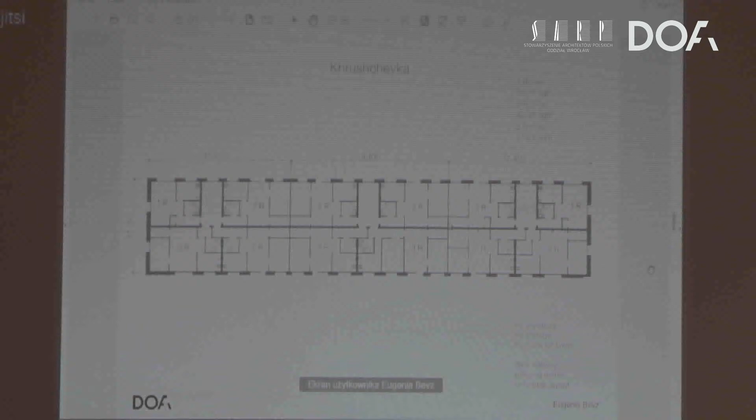And speaking of apartment layout, we had dark hallways, passing rooms, and inflexible layout. So we looked backwards at how housing, the most popular unit in the USSR, was built, and indicated what was there. The positive feature was that they all had a balcony.

The balcony is a very special feature that is widely popular to have privatized in post-Soviet countries, but also as an extension of your living space. Alexander Burlaka, an artist from Ukraine, has an amazing book called Balcony Chic that shows how those balconies are inhabited and personalized in housing.

You can see here the examples from the book that show an extension of living space outwards to the street, and different ways how people inhabit those balconies.

So I thought it was a brilliant idea, and what if we could use the balcony to suggest more flexibility in the layouts of the apartment, so that more people have privacy in their spaces.

Because what I haven't mentioned is that many Khrushchevkas had passing rooms, where you would not be able to have your own privacy in the room, but you need to pass through the room to get to the bedroom.

So here is a project I'm currently working on called Zelenki TM. Zelenki means 'green' if translated from Ukrainian. This shows an example of how the balcony can be a special feature providing extra quality to the planning structure of the apartment.

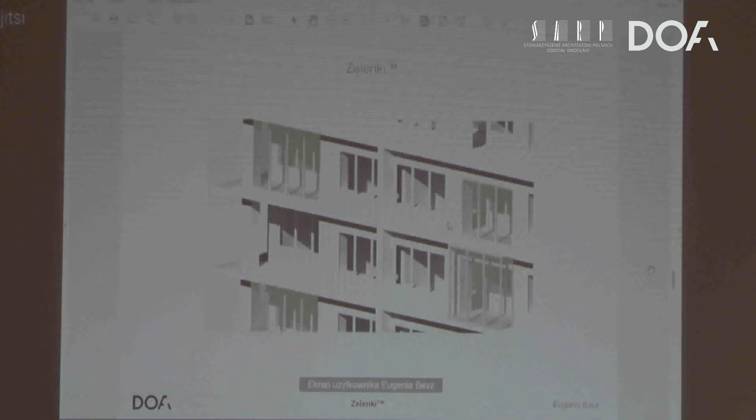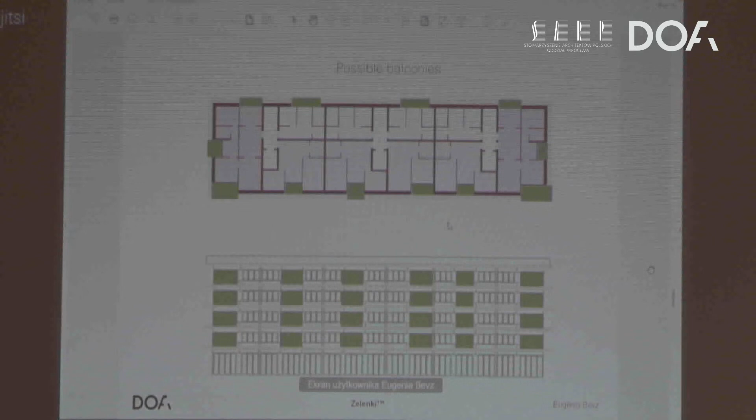It becomes a kind of shared space within the family, and also becomes a passage room, a solution to the problem young families face when they need more rooms. This diagram shows how those balconies can extend along the facade, becoming part of an organized informality on the facade that is currently unorganized.

Here, if we look more closely on the plans of those apartments, you can see this is a two-room apartment, one of the most popular. Those layouts show how by adding the balcony, you can create circulation around those spaces and therefore provide privacy to young families, for example, having guests, or if they have relatives living with them and need an extra room. So sometimes it's from a minimal option to a maximal privacy option, when you can add space for a separate kitchen, or add a balcony and have circulation around those rooms without disturbing anyone.

As I said, it's just one of the features I wanted to highlight, how to work with those elements of, let's say, solidarity in design, providing small features, big changes to the layouts. Those are examples of one of the blocks, a typical floor plan with 1, 2, or 3-room apartments. Those 2-room apartments, because of that small change of the balcony, can become 3-room apartments. The same feature can turn 3-room apartments into 4-room apartments with a very small area.

And on the ground floor, there are more features, so it can have shared facilities, for example, daycare or preschool, and some shared kitchen near the entrance area. Of course, it can also keep some of the 2-room apartments, which are the most popular, and provide a garden entrance to those. On the bottom floor, there can be room for strollers and bikes, and it is a work in progress. I wanted to share with you how we actually use a methodology to provide the qualities to design.

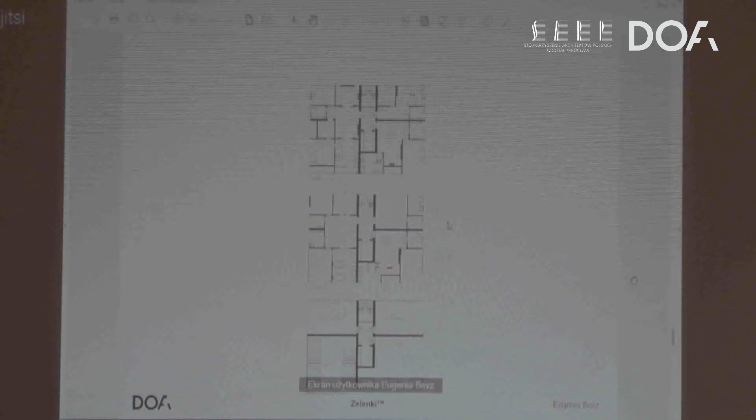The next project I'm going to mention is in Harlem, New York. It was actually an answer to a brief for a competition organized by New York. The question was how you can provide units on very small, narrow lots in New York City. These lots usually have a traditional development plan with a section with minimal shared space and maximum private space, but also very compromised insolation, because the inner space becomes very dark.

Therefore they need some type of hole in the middle, and that is not very accessible and doesn't create much quality. But we suggested an idea to actually split them in two and provide shared space that connects them and brings quality. So it suggests an efficient private unit layout combined with shared space. This is especially valuable for New York, because it creates privacy and security, a space protected from the outdoor environment, where you can have family gatherings or friends over.

The last project I'm going to mention is called Agricultura. That is a suggestion for one of the Europan organized competitions, an answer to a brief in Finland, Lake Tuusula. It is a development strategy for a post-agrarian village that suggests rehabilitation strategies focused on developing a special kind of post-industrial village. What it does is create a social infrastructure and enhance industry with technology, a research and development center, mixed housing, a residency program, and tourism.

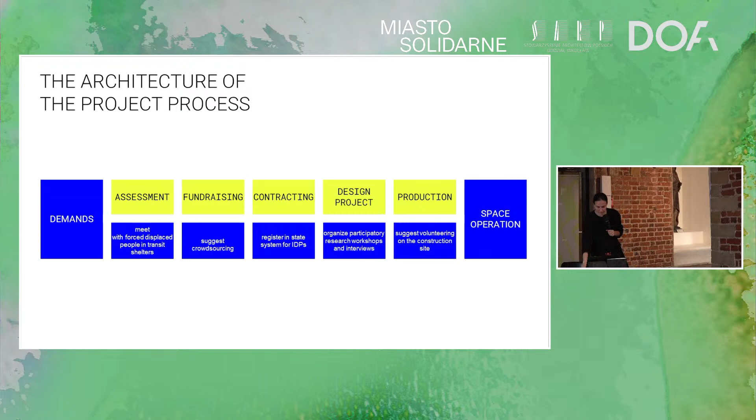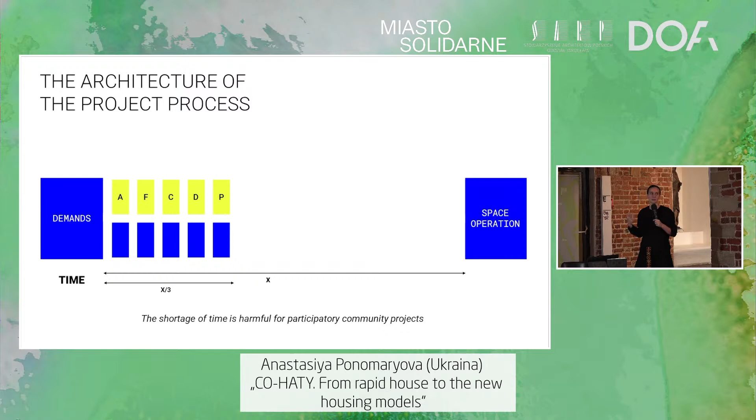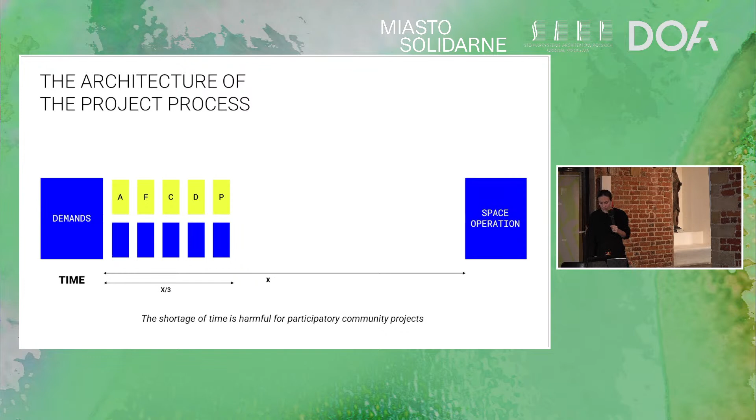That's a very good idea, but in real practice, we did take some action toward that. We organized a community development workshop, which is very difficult to do in this rapid project when you work against the clock, but we try to do our best. This shortage of time is very harmful for a participatory project. When you try to finish the space before December, you cannot rely on your criteria to empower community, you should prioritize something, either architecture criteria or this softer criteria. So this dilemma we are not solving yet, we've just realized that we have it, and I hope we'll find the answer to that.

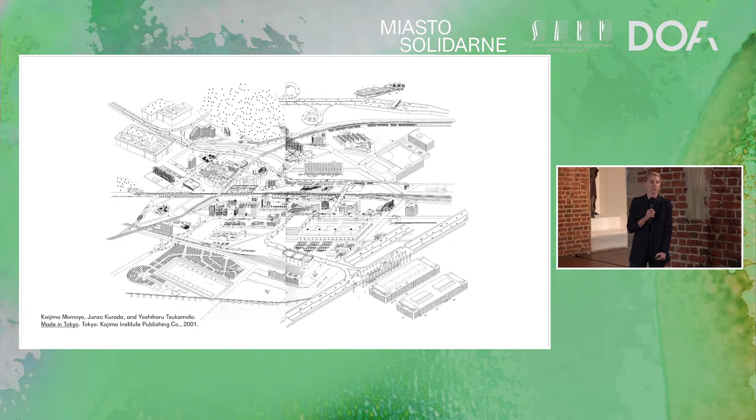This is the relation we're trying to do or perform in any scale we're working in, whether that's interior design, a house design, or a building design.

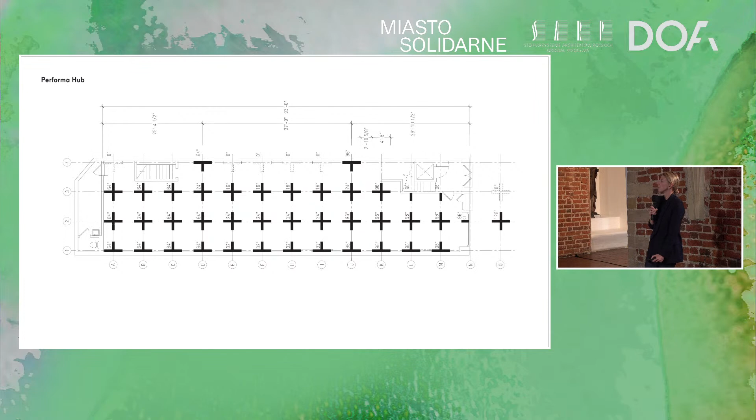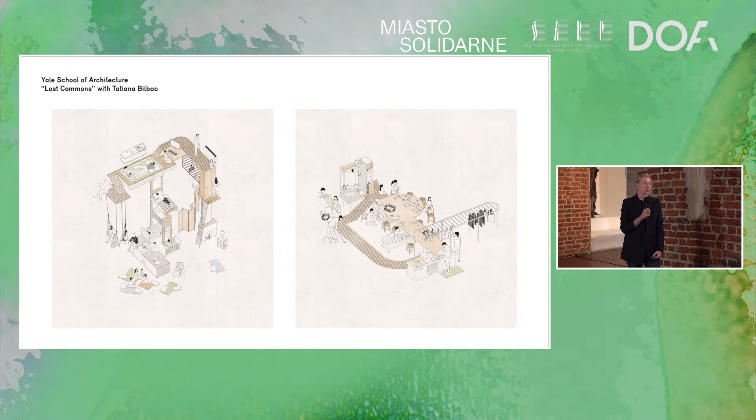I'm also teaching in architecture school. I've been teaching with Tatiana Bilbao and Frida Escobedo at Yale School of Architecture. The topics we're teaching are very much related to the topic of the festival and have to do with how we can live together. The studio I taught with Tatiana Bilbao was called Lost Commons, where we try to uncover the lost opportunities to live together and share spaces and activities that create community. With Frida Escobedo, we worked on a project called Expanded Domesticity, which talked about other functions that could exist within housing and cities that would allow people to get together, share resources, and create communities.

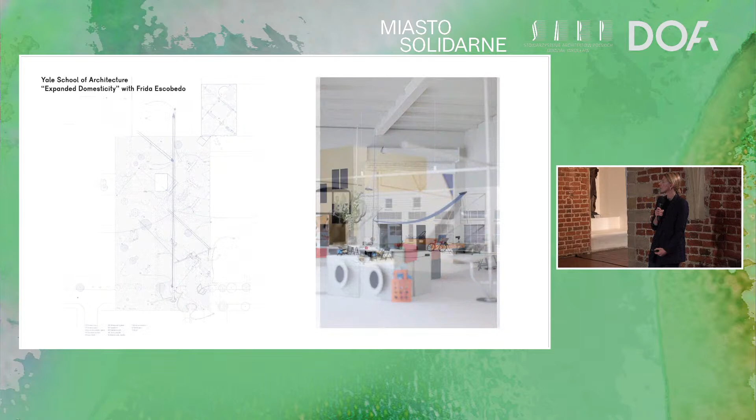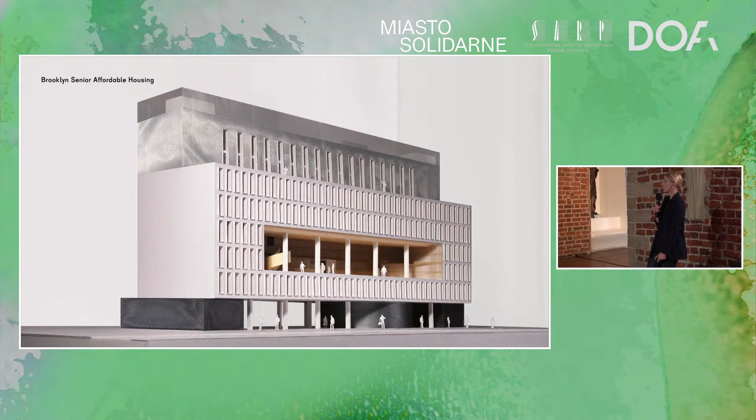So I'm going to show two projects. One is an affordable senior housing, an 84-unit senior affordable housing located in Brooklyn, New York. It's a project we did a couple years ago, and we received permits for construction. It's a project for a non-profit developer, an existing non-profit, non-governmental developer that works with the local community.

They've worked with the local community for a long time, refurbishing old apartments and buildings, not unlike the ones we saw earlier, given the lack of housing, the housing crisis, and the very high number of homeless people in New York City. That specific building is dedicated to formerly homeless and senior people, so in design, we were thinking specifically about this demographic and age group.

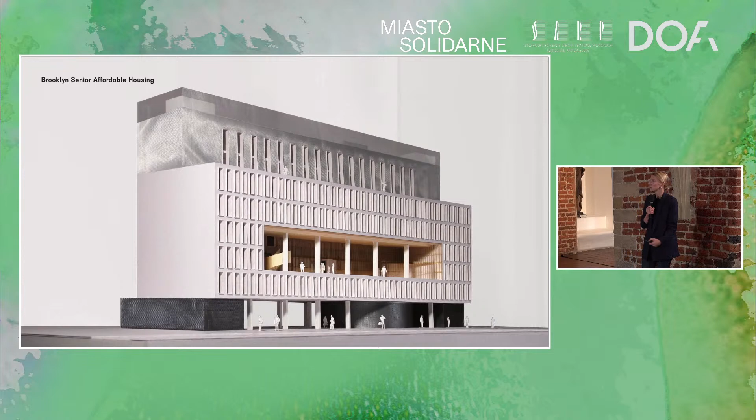When we thought about designing, we not only thought about units, but tried to think about spaces where community can be created. We also thought about health—physical health, how people with disabilities and mobility issues can get around all spaces in the building—but also mental health, how older people who are often alone and don't have family around them can find their new family within the building structure. We thought about spaces specifically designed for that.

We also thought about combining seniors with very young children. So as part of the community facilities and program in the building, we proposed a nursery and a kindergarten. Mixing different ages is a benefit for both, and it doesn't relegate the seniors only to their own demographic group. The project is very simple and exists in a very specific urban context with specific zoning regulations.

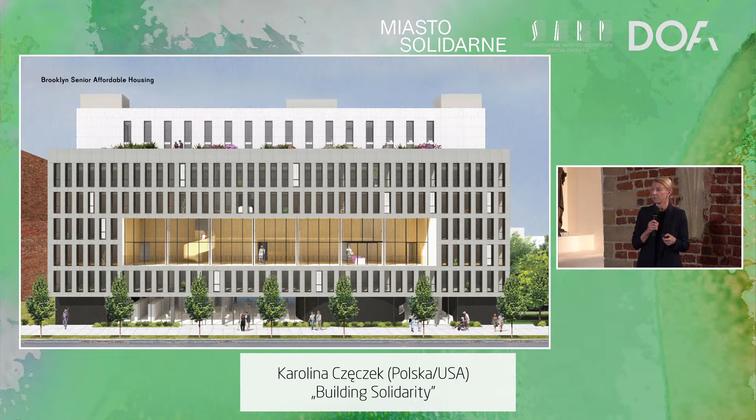With very specific building regulations, we had to work both with the developer and the city. When we tried to permit the project, the first question was, what is that big space in the middle, and can we have more units? Our answer was no. We need spaces—we actually maximized the number of units we could build in that specific lot, and we think providing more spaces for integration and socialization is more important than squeezing 10 or 8 or even 12 more units.

So that's how we came up with this so-called loggia, a big shared space in the center of the building. It's a space people can use to socialize, to cook—there's a kitchen on one side—to organize big community dinners, have yoga, dance classes, whatever you want. It's a shared living room for all the inhabitants in the building, since their units are relatively small.

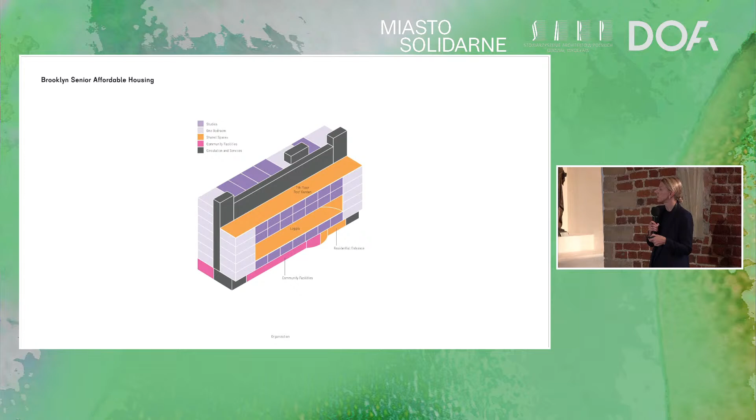On the ground floor, we have community facilities: a rehabilitation center, a health center, and the kindergarten I mentioned earlier. On the roof, we have a space for gardening and relaxing. So almost each floor in the building has a function that expands to the community. This is a short diagram showing that, and this is an axonometric exposing how some of those spaces are organized and combined within simple geometric volumes.

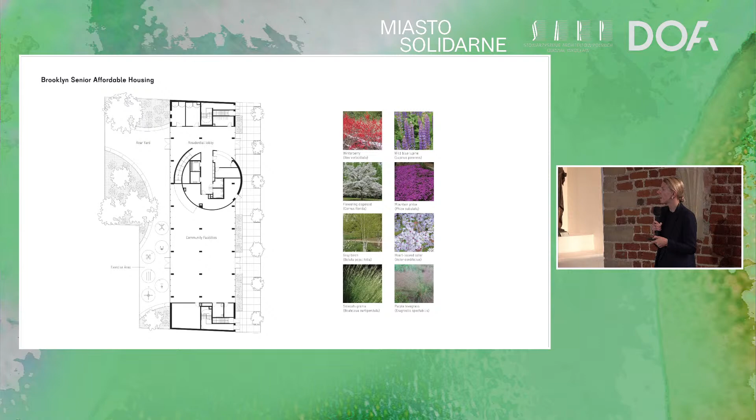We also have a garden specifically designed with planting that changes throughout the seasons, creating a pleasant space to be. There's also an outdoor gym for seniors that they can use for their own health purposes, and an open ground floor so that as operators enter the building, different functions can be inserted. Moving up, this is still the image from the backyard.

Moving up, we also didn't want people to only use elevators, and there is actually an initiative in New York to provide so-called active designs. Projects, especially for seniors or people who have mobility issues, are encouraged to have a secondary circulation, steps that are designed in a more relaxed way to encourage people to still move, to walk one, two, three flights of stairs a day, to stay mobile.

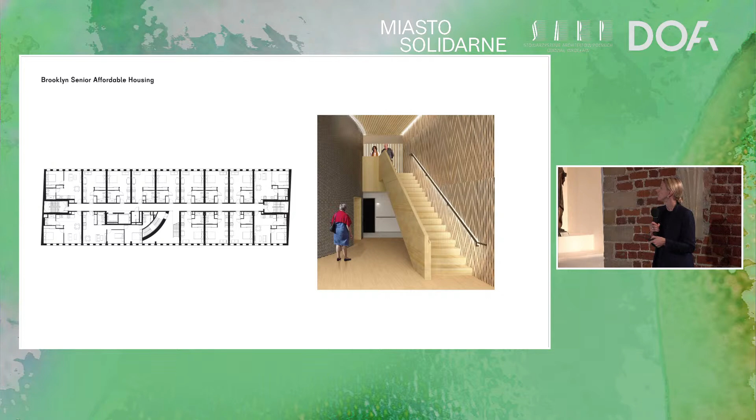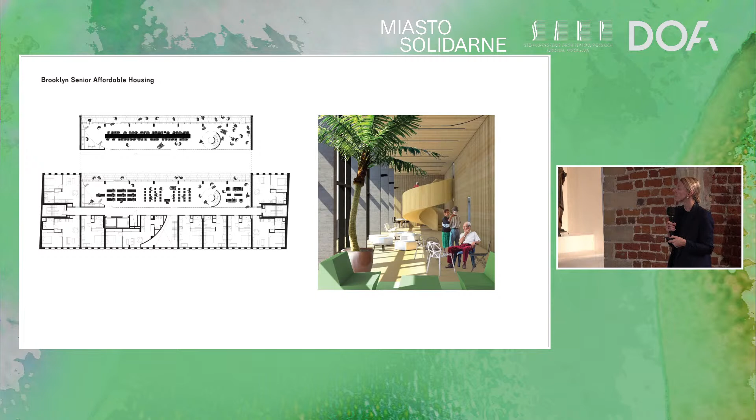Those steps lead to the loggia, which is a big open space, and we try to show in a plan how this space can be used for many different events. We have a big, probably too big, shared table for a kind of family dinner for the whole community, but also smaller events and curtains that would allow subdivision for different functions happening in the building. And the roof I mentioned earlier would allow gardening and relaxation.

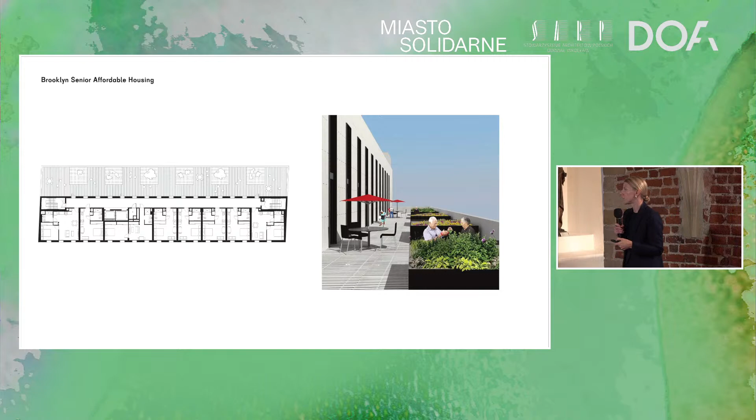Units are relatively small, but they're also designed thinking of people who live alone, people who live as a couple, or people who might live with a help nurse or somebody who needs to stay overnight, to accommodate all stages of senior living.

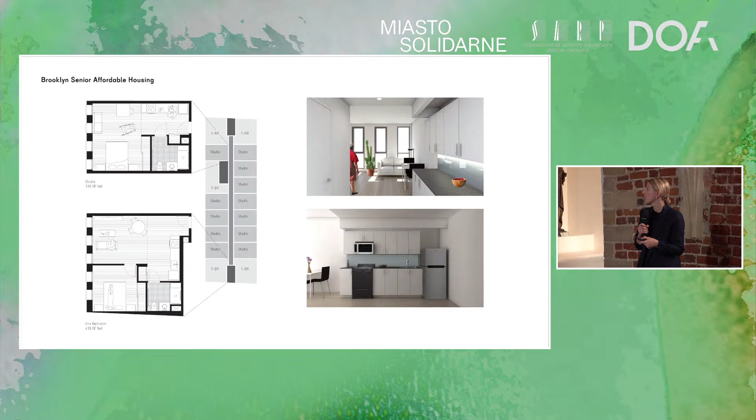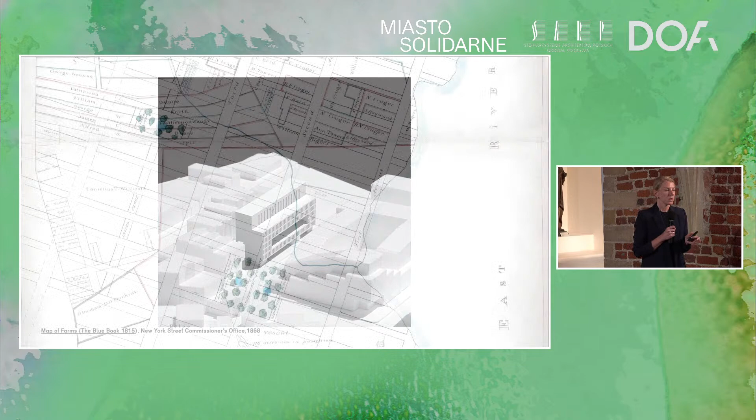This is the project I said we worked on and received permits, so we hopefully will be continuing on that one. Another project, which is maybe a little less related to solidarity per se, but it's maybe solidarity in a sense of the city fabric. New York City is very well known for its grid, and the US in general is very well known for suburban sprawl.

Unfortunately, being from Poland and seeing how housing is being built now here, I can see there is a desire to repeat the so-called American dream, which I think is not the Polish dream, and we should have our own and find our own way of building housing.

So in this project, called Irregular Development, we focused on city densification. First, to provide housing on a smaller scale. Second, to provide housing in vacant lots within very specific communities and avoid big projects on big lots by big developers who are mostly doing it for profit.

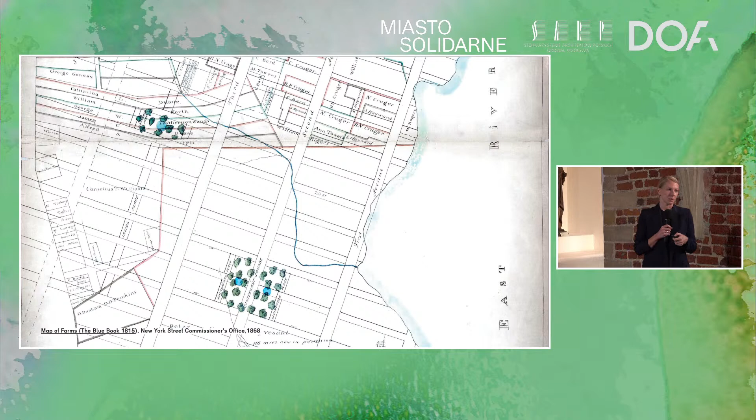In that project, we were looking at the city grid, and actually trying to look beyond the grid. We looked at the irregular lots that resulted from different subdivisions, sometimes mistakes in planning subdivisions, and lots that became empty because of urban renewal.

Especially in New York, a lot of parts of the city, and especially those inhabited by African Americans, were so-called redlined, meaning the people who owned houses there could not get a loan to renovate them or to construct anything—basically a very clear policy discrimination against those people.

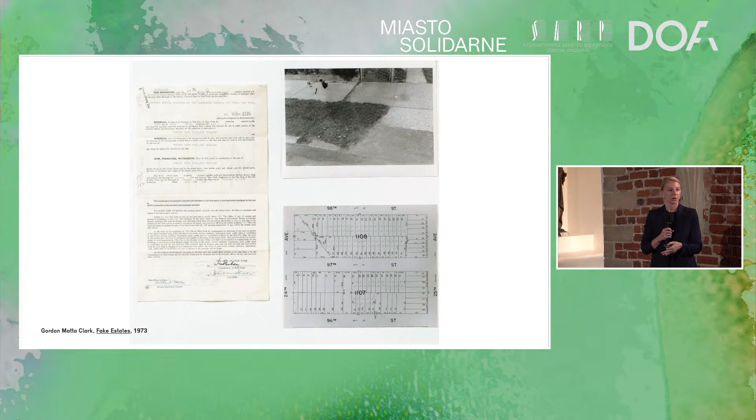In the 60s and 70s, a lot of those lots were considered a slum, and a lot of buildings that were built there were destroyed. Some of the lots we mapped were actually the results of those discriminative policies and the further destruction of the city fabric.

But we thought it's an opportunity—an opportunity for smaller developers, maybe community-based developments, land trusts, which are organizations that own several lots within the community, invest in those lots, and maintain the value of that land, which in New York is very high within that specific community, sometimes a neighborhood, sometimes a block.

But the third plus was also an opportunity for younger architects and creative people like us, who can propose different ideas about housing on a smaller scale.

So we basically mapped all the lots. There are triangular ones, narrow ones, and small ones. A narrow lot means it's narrower than 4 meters, which is a lot you technically cannot legally build on in New York City. There are loopholes to do so, but in general those are the lots nobody would ever try to build on. And of course there are leftover lots that nobody even tries to touch.

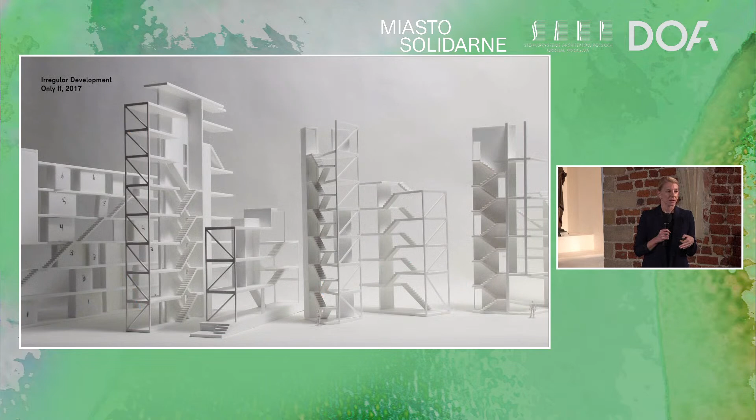So we proposed nine prototypes of housing. It's multiple family housing, affordable housing, where the rent is set in a way that average earners in that area can afford to live in those houses.

And then we created an exhibition where we showed all the lots and all the buildable space that we can receive by building on those lots. This is shown on the wall. There's 3,600 lots like that in New York City, and 600 of them are actually owned by the city. So we also created a manifesto for the city saying that those lots should be used, that this is a valid space. Yes, it's irregular, it's unwanted, but it's still a space that can be used, and it will make a difference in the community or on the block where that lot will be built.

So after that exhibition, we were approached by the city that wanted to organize a competition for them and create a series of affordable housing projects. We wanted to take part in the competition, so we said please organize it, we'll take part, we don't want to be advisor. And yes, the city a year after announced a competition called Big Ideas for Small Lots.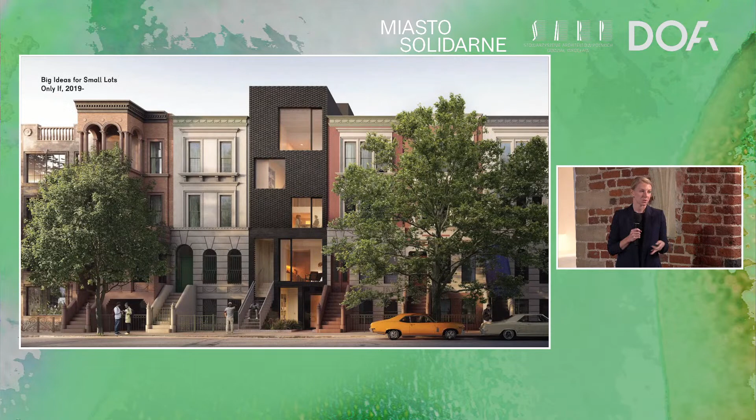So they acknowledged the need to use those lots and the impact that building on them, especially affordable housing with community facilities, can have. There were 23 lots they identified, and there was one lot in Harlem that was a subject of the competition. We were one of the 5 winners, and we're now working with the city to develop those lots.

The process is such that the city will transfer the lots to the winning teams, who will also team up with local developers rooted in the communities where the lots exist, and we will together work on building housing that fits the community it's in.

So it's not some kind of copy-paste design from somewhere else. It's not 1,000 or 3,000 units, it's 12 units, it's 8 units. It's a very small number of units that are affordable and match the demographics of that specific community. So the mixture of units also depends on who lives in the area and what their needs are.

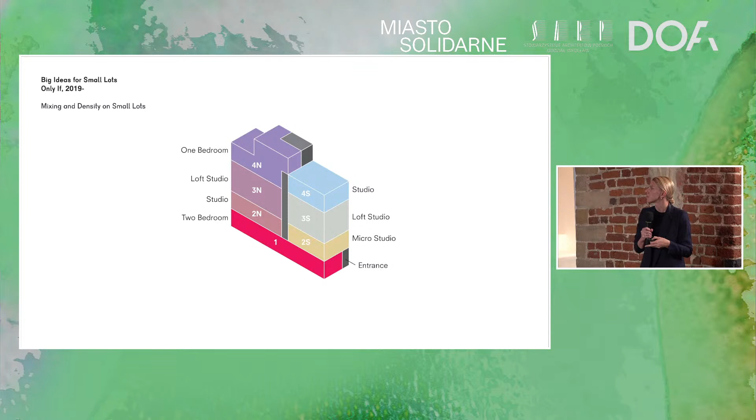There are units that are accessible for people with disabilities. There's studio spaces for young professionals. There are 2 bedrooms, 1 bedrooms for families, and everything is relatively compact given the size of the lot. But nevertheless, it's a space that tries to create dignified and good quality, affordable housing.

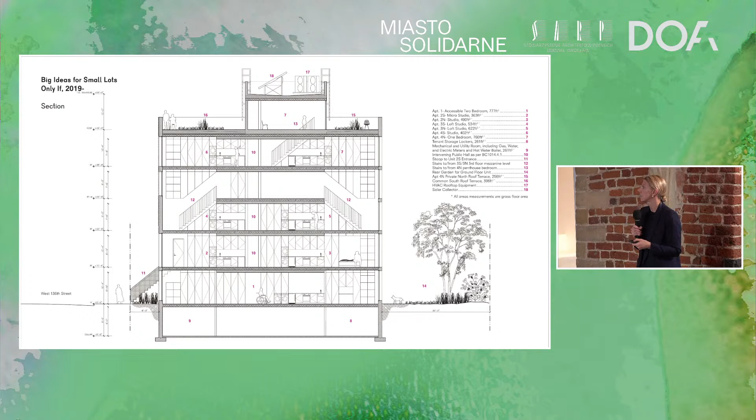Very often when we think of affordable housing, people think about housing of lower quality, maybe very far from the city center, but what these lots and projects are trying to do is provide good housing and good quality of living for everybody. And of course include shared facilities on the ground floor, but also on the roof where the community and people who live there can gather and live together.

So those are some of the plans. I'm not going to go in detail through them.

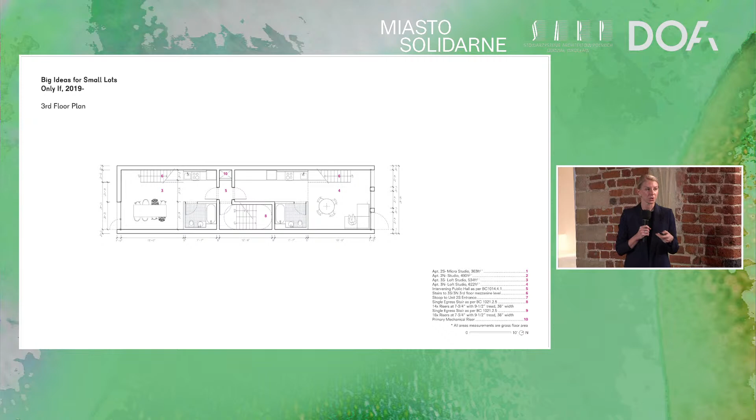What we also proposed is creating this kind of integrated prefabricated furniture system. Given the fact that the spaces are relatively small and small units get cluttered really quickly, we proposed as part of the building to build in furniture, meaning we thickened one wall and proposed to build in all the storage, kitchens, even fold-out beds that would allow storing all the life things on one side, and then receive an open space for everyday activities on the rest of the floor plate.

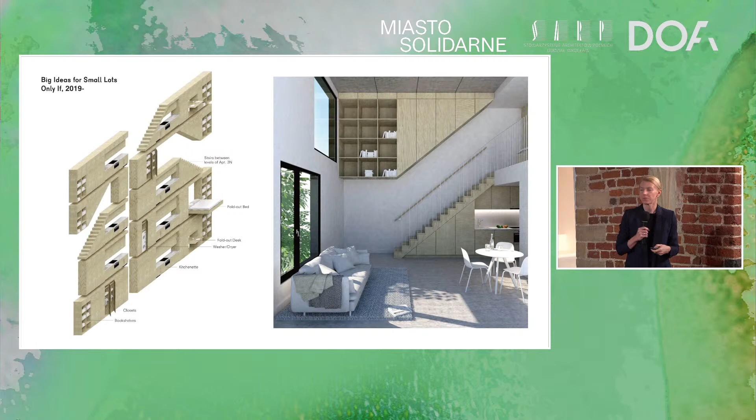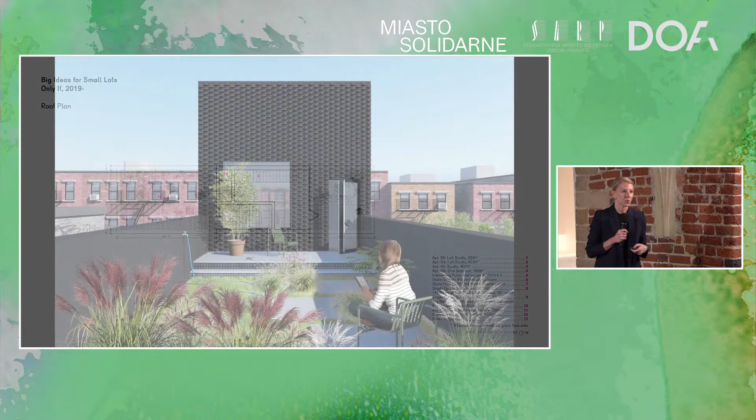There is, of course, a roof that was designed before the pandemic, but after that, we realized how important access to even the smallest balcony was during that time. And unfortunately, the city takes a very long time to move forward with this project. It's been 3 years. There are different reasons why we cannot continue, but we keep getting promises that this project will happen.

We basically got a little bit impatient, meaning my practice, and we actually found ourselves a lot like that within the neighborhood we live in. And we decided to build a prototype. Unfortunately, it's not a multiple family house, it's a single family house, but we tried to prove through that project that it's possible to build affordably and relatively cheaply on the lot that nobody wanted to buy.

And the price of that lot was just crazy, not expensive for New York City, because that lot was 4 meters wide, which is maybe not uncommon in Europe, because we know examples in Netherlands and other places where such narrow lots exist.

In New York, city zoning actually prevents building on that lot, unless on December 15, 1961, which is prior to the zoning change in New York City, that lot existed as such, meaning it wasn't further subdivided. Those laws are also in place to prevent building housing of lower quality, housing that doesn't have light access.

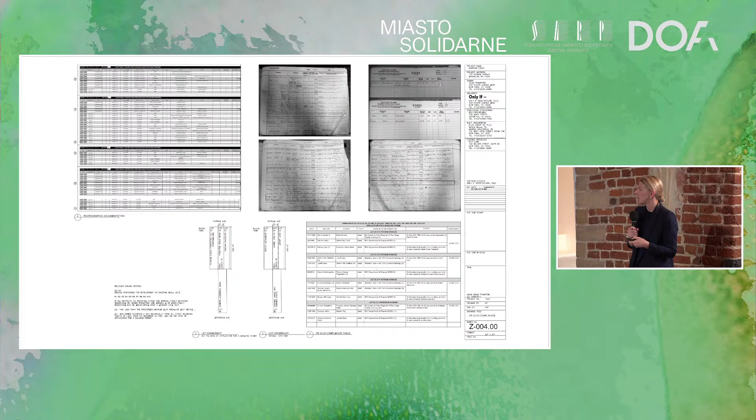But what we try to prove is that even on narrow lots, even spaces that nobody wants to live in, there is a way with creativity to design space to live. I'm just going to quickly scroll through that project, it's a single family house and maybe not so much related to solidarity, but it proves that it's possible to affordably build housing on lots like that.

So when you see this single family building, there's also an empty lot next door, and that's one of the lots the city owns. If we move forward, we will be building kind of a twin brother of that house, but as multiple family housing.

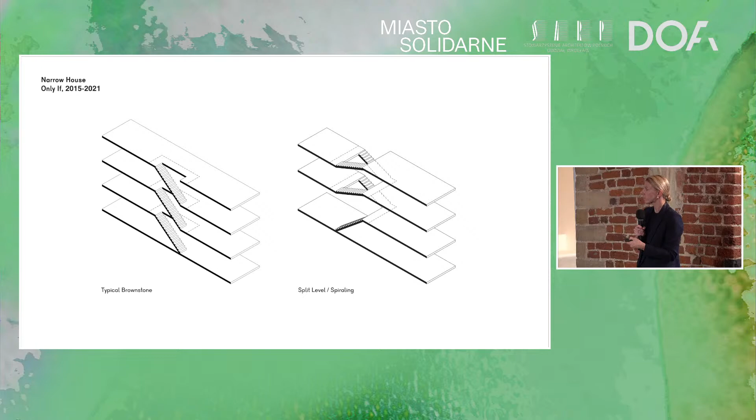For now, we were just able to show how simple spatial organization, reorganizing how floor plates and circulation works inside, introduction of bigger windows, and a kind of split level system can create a very spacious space for living.

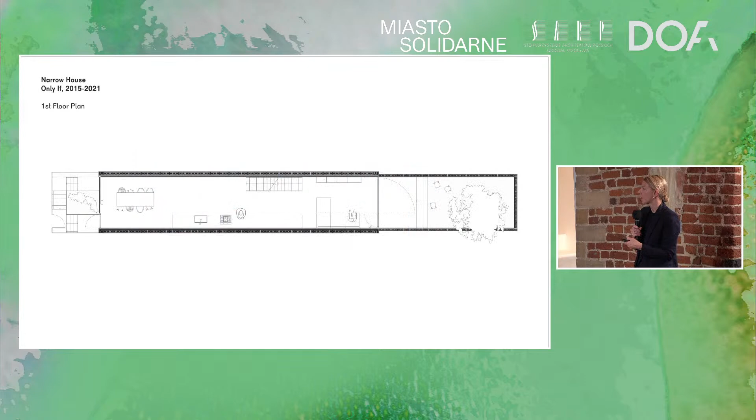This project is built, and we are of course using and sharing all the development performance and calculations to prove that with this construction method, which is very simple—concrete block, metal deck, and concrete foundations—you can build a house like that in New York City.

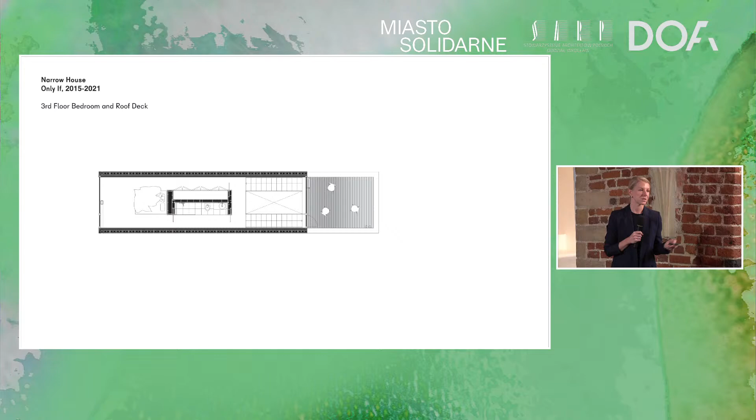The last project is something very much in progress, a kind of research of mine that I worked on for a couple years, and it has to do with public space. Coming back to the city fabric, we looked at the lots, irregular spaces, and how to build housing, but we also look at public spaces—spaces that people use and engage and interact in.

For me, swimming pools were always spaces like that. I grew up going to my hometown swimming pool in Krosno. We used to go to Hungary to swim, from south of Poland. It's somehow a memory of how you interact and spend free time, and how in a public space you interact in a relatively intimate way—you're in a swimming suit, exposed with your body, your physicality, to everyone else.

I got interested in swimming pools also because in New York City, it turns out they were built according to very specific city policies. It wasn't just an idea for a pool with an architect hired to do so. There was a very strategic construction first under Robert Moses, who was a planner and parks commissioner, who built humongous swimming pools with federal funds at the beginning of the 20th century. The biggest pools you can see here are those built at the beginning of the 20th century, and they were very early places of recreation.

Before that, there were public baths—places where people would go to wash themselves, not to recreate. It was a space where people who didn't have access to running water would come. But one by one, over time, they became spaces of recreation. When it came to the construction of the big swimming complexes, they were fully recreational spaces, and those pools still exist and work today.

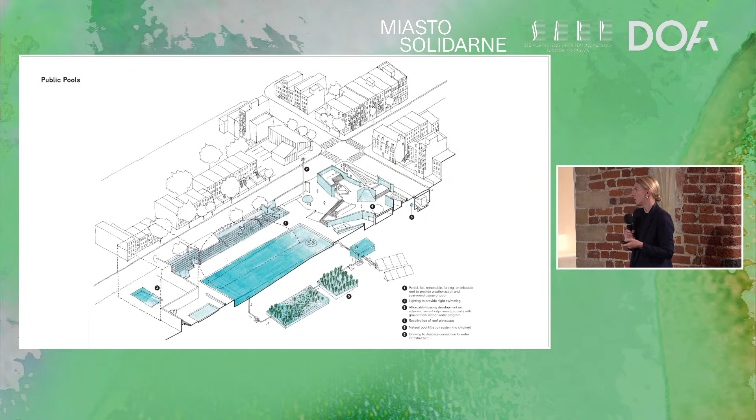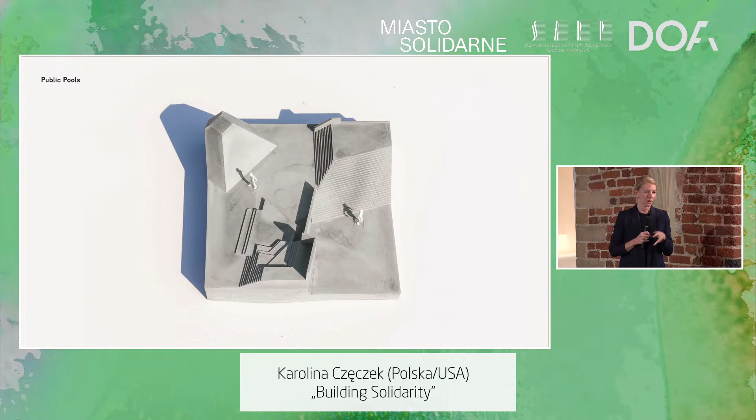This is a model that we'll be constructing — just a test — and it will be part of the exhibition at the MoMA next year, called New Publics New York, which showcases projects or ideas for projects that are supposed to change how public space or public buildings in New York City are supposed to work, and how people in the city should share resources and basically live together in a sustainable way.

So I'm going to finish here, thinking about the time that we have left.